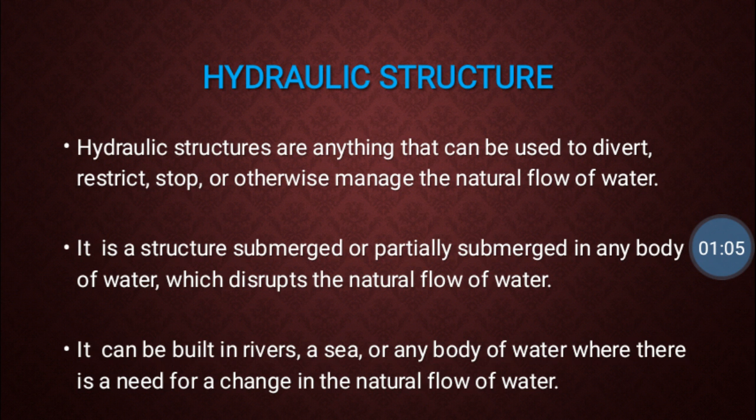hydraulic structure. The hydraulic structures are anything that can be used to divert, restrict, stop, or otherwise manage the natural flow of water. It is a structure submerged or partially submerged in any body of water which disrupts the natural flow of water. It can be built in rivers, a sea, or any body of water where there is a need for a change in the natural flow of water.

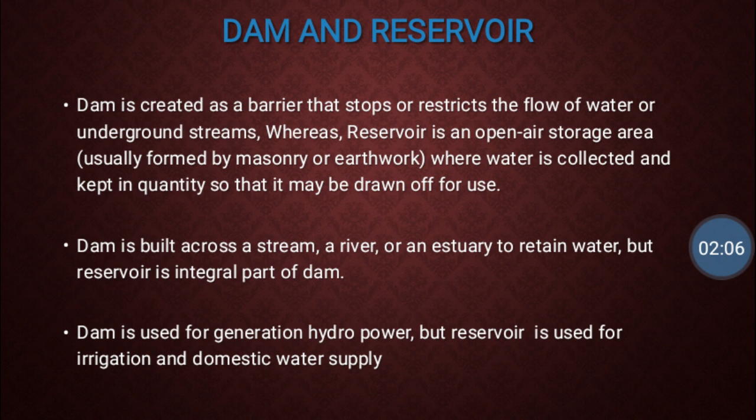Now, dam and reservoir. There is quite a difference. The dam is created as a barrier that stops or restricts the flow of water or underground streams, whereas a reservoir is an open air storage area where water is collected and kept in quantity so that it may be drawn off for use. A dam is built across a stream, a river, or an estuary to retain water, but the reservoir is the integral part of the dam. The dam is used for generation of hydropower, but the reservoir is used for irrigation and domestic water supply.

After several delays, the main dam was completed 20 years later on 26 July 1980. By second stage completion in 1987, the project converted to a multi-purpose facility with generation of 770 megawatt. At the top of the dam, a power station is located to generate and distribute the power.

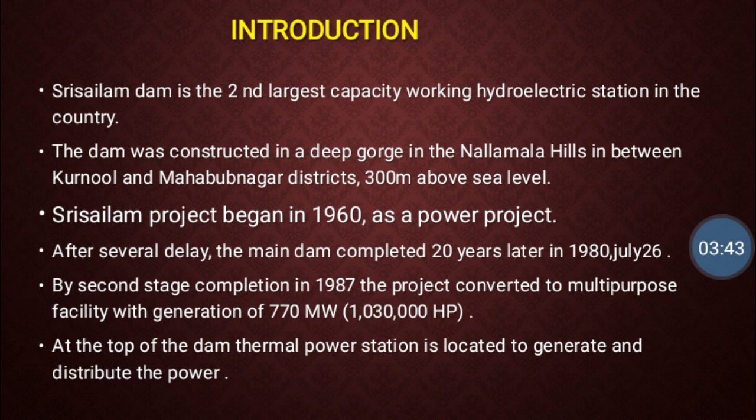Now, the general information. Its purpose: hydroelectric, irrigation and water supply. Country: India. Its location: Srisailam, Kurnool district in Andhra Pradesh. Coordinates 16 degrees 5 minutes 13 seconds north and 78 degrees 53 minutes 50 seconds east. Construction began 1960. Opening date 1981. Construction cost 10 billion rupees. Owner: Government of Andhra Pradesh.

Now, regarding dam and spillway, the type of dam is gravity dam with top elevation 275.54 meter, height above the deepest foundation level is 476 feet. It impounds the Krishna River, height 145.10 meter, length 512 meter, spillway: ogee spillway. Maximum discharge capacity of this spillway is 38,369 cumecs. Number of spillway gates is 12 of size 18.3 by 16.7 meter. Number of river sluices is 2 of size 3.65 meter by 9.14 meter.

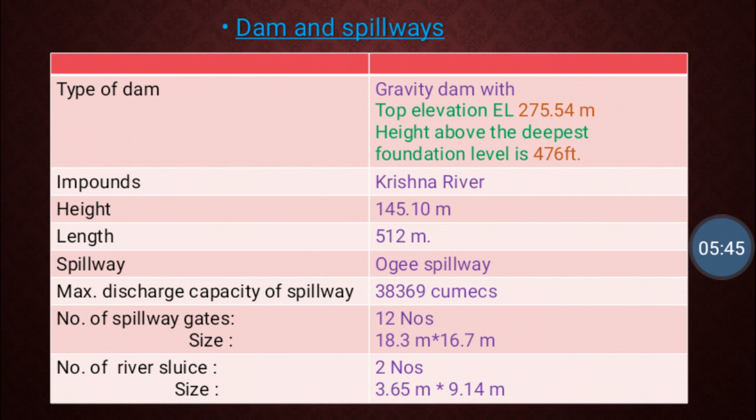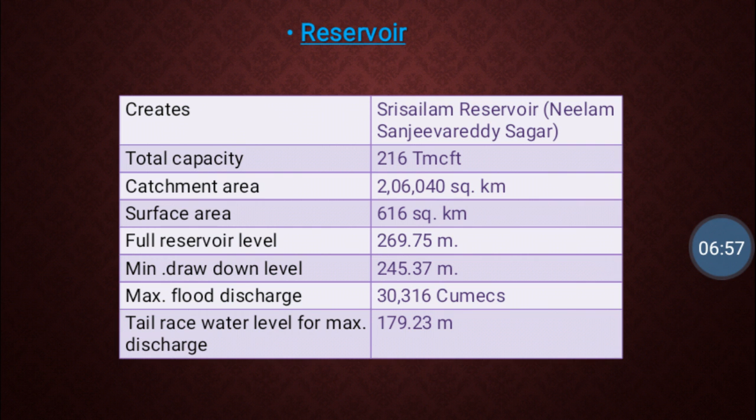Now reservoir. It creates Srisailam Reservoir, that is Neelam Sanjeeva Reddy Sagar. The total capacity of this reservoir is 216 TMC feet. TMC feet is 1000 million cubic feet. The catchment area is 2 lakh 6040 kilometer square. Surface area 616 kilometer square. Full reservoir level 269.75 meter. Minimum drawdown level is 245.37 meter. Maximum flood discharge is 30,316 cumecs. Tail water level for maximum discharge is 179.23 meter.

Now power stations. The operator is APGENCO, Andhra Pradesh Power Generation Corporation Limited. The turbines: 6 of 150 megawatt reversible Francis type turbines are used on the left bank, and 7 of 110 megawatt Francis type turbines are used at the right bank. Installed capacity is 1670 megawatt. The picture of the Francis type turbine is given below.

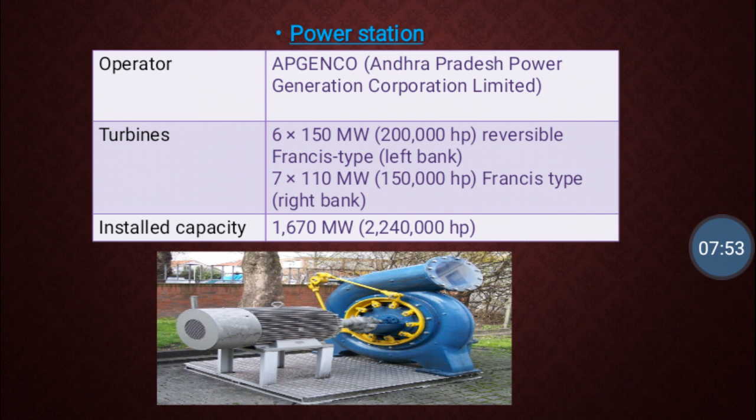Now I will tell you about the irrigation scheme. The Srisailam right main canal is constructed with 44,000 cusecs capacity at Srisailam reservoir level of 269.22 meter mean sea level to feed the 5 reservoirs, that is Veligodu reservoir 16.95 TMC feet, Brahmamsagar reservoir 17.74 TMC feet, Alaganoor reservoir 2.97 TMC feet, Gorakallu reservoir 12.44 TMC feet, Somasila reservoir 78 TMC feet.

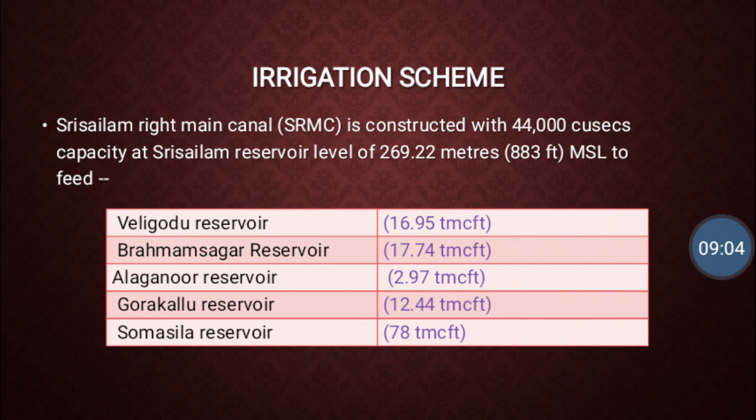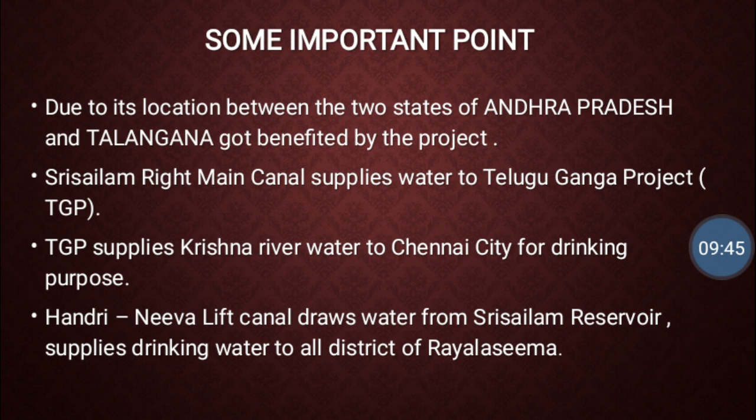There are some important points regarding the Srisailam reservoir. Due to its location, the two states of Andhra Pradesh and Telangana got benefited by this project. Srisailam right main canal supplies water to the Telugu Ganga project. TGP supplies Krishna River water to Chennai city for drinking purposes. Handri-Neeva Lift Canal draws water from Srisailam Reservoir and supplies drinking water to all the districts of Rayalaseema.

Now some important facts for hydroelectric power. At present, the initial inflows into Srisailam Reservoir are stored excessively without using for power generation. The tail pond was completed during year 2017 and pumping mode operation is being done. Even the downstream Nagarjuna Sagar Reservoir water level is below 162 meter mean sea level. The tail pond has nearly 1 TMC live storage capacity.

Water supplies were maintained by APGENCO using two power stations, left bank and right bank, and transmitted through AP Transco. The tail pond dam is located 14 km downstream of Srisailam Dam, under advanced stage of construction, to hold the water released by the hydro turbines and later pump it back into Srisailam reservoir by operating the turbines in pump mode.

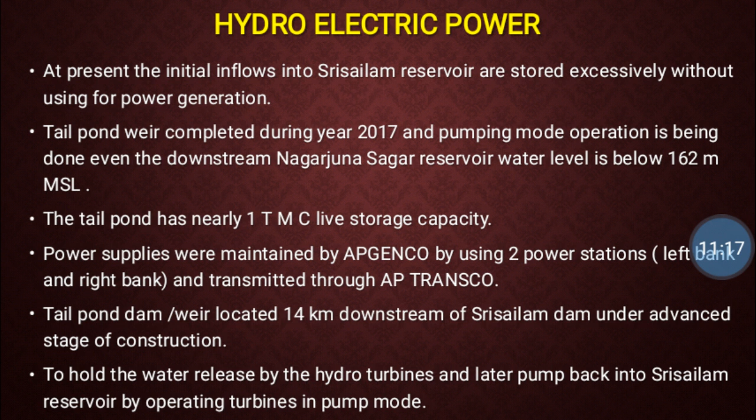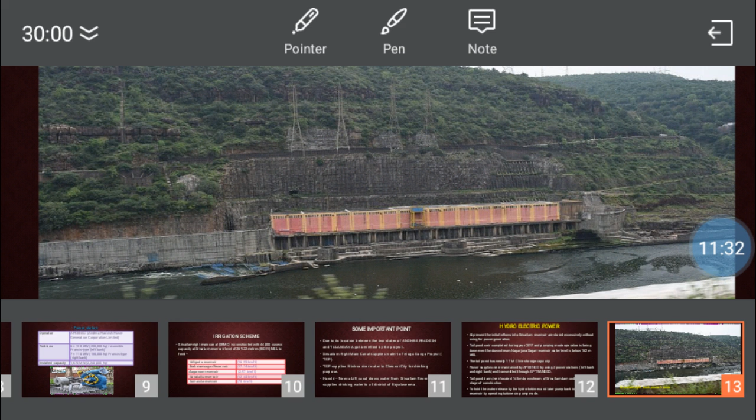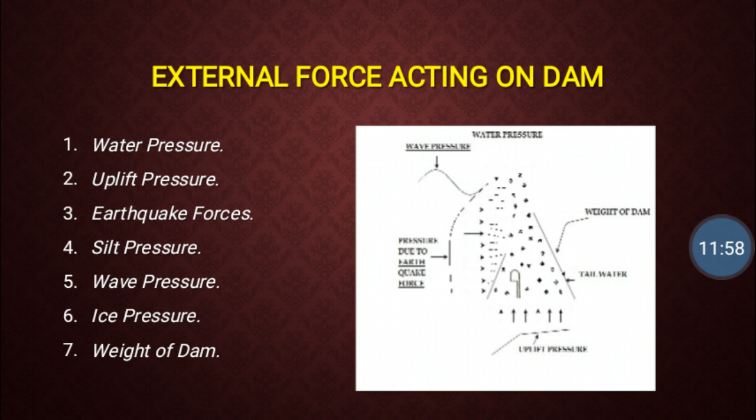This is a beautiful picture of Srisailam right bank powerhouse. Now there are some external forces acting on this dam, that is water pressure, uplift pressure, earthquake forces, silt pressure, wave pressure, ice pressure, and weight of dam. The picture includes all these forces as shown here.

First one is water pressure. Water pressure is one of the major external forces acting on a gravity dam. The horizontal water pressure exerted by the water stored on the upstream side of the dam can be calculated from hydrostatic pressure distribution. The picture has the resultant of this pressure from the base at the height of h by 3.

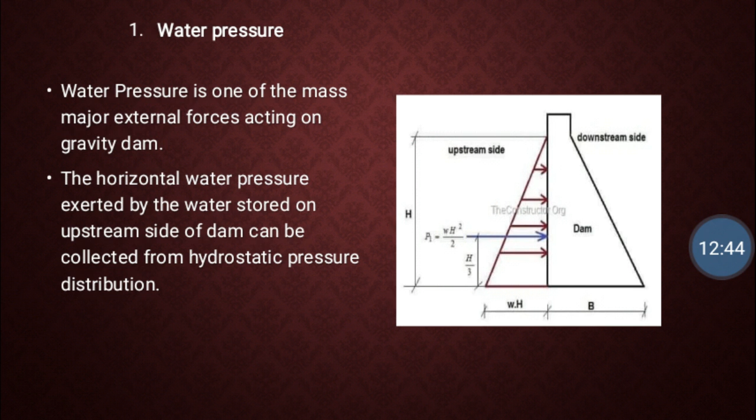The second one is uplift pressure. Water seeping through the pores and fissures of the foundation material and water seeping through the body of the dam. This pressure virtually reduces the downward weight of the body of the dam, hence acts against the dam stability. It can be controlled by constructing cutoff walls under the upstream face, by constructing drainage channels between the dam and its foundation, and by pressure grouting the foundation.

Here I provide a picture which includes two figures. One is without drainage gallery and one is with drainage gallery. Both have different pressure distribution diagrams.

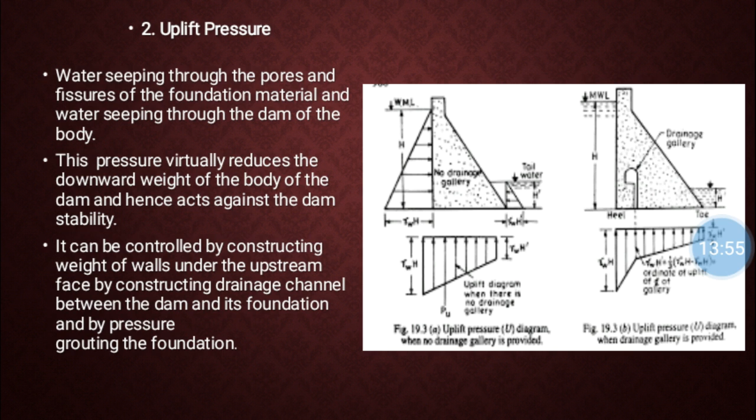Third one is earthquake forces. The effect of earthquake is equivalent to imparting an acceleration to the foundations of the dam in the direction in which the wave is traveling at the moment. Acceleration can be split into two components. First is horizontal component, second is vertical component. So the horizontal acceleration alpha h is equal to kh into g and vertical acceleration alpha v is equal to kv into g.

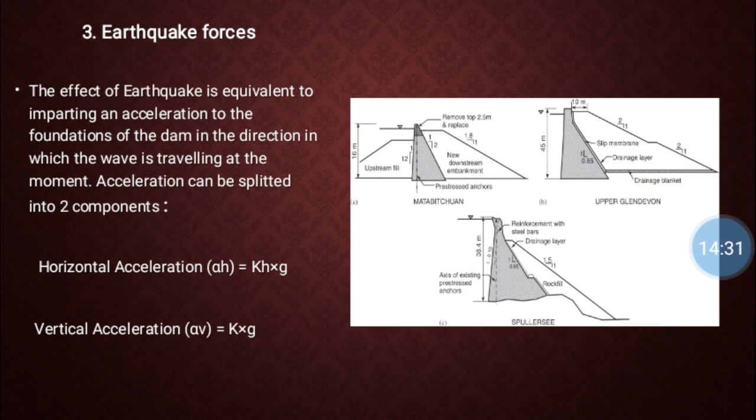Now silt pressure. If h is the height of silt deposited, then force exerted by the silt in addition to external water pressure can be represented by Rankine's formula. The formula is P is equal to half into gamma submerged into h square into Ka, and it acts at h by 3 from the base as shown in figure, where Ka is 1 minus sine phi divided by 1 plus sine phi. Gamma submerged is the submerged unit weight of silt material, and h is the height of silt deposited.

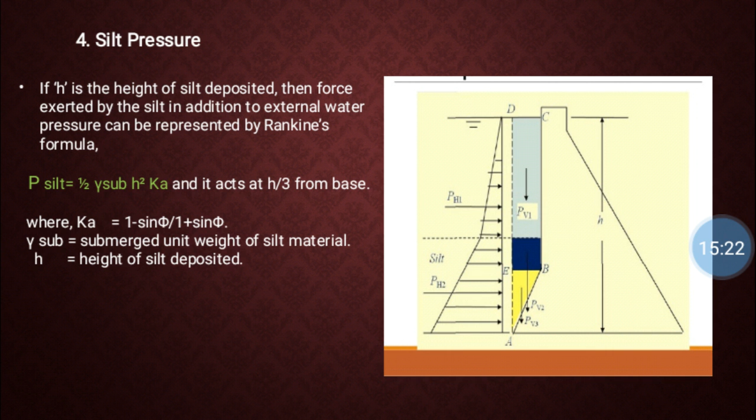Fifth one is wave pressure. Waves are generated on the surface of the reservoir by the blowing winds, which can cause pressure toward the downstream side, and it depends upon the wave height. The wave height may be given by the following equation, that is hw is equal to 0.032 into under root VF plus 0.763 minus 0.271 F power 1 by 4. This equation is valid for F less than 32, where F is the fetch or straight length of water expanse in kilometers. V is the wind velocity in kilometers per hour. hw is the height of water from top of crest to bottom of trough in meters.

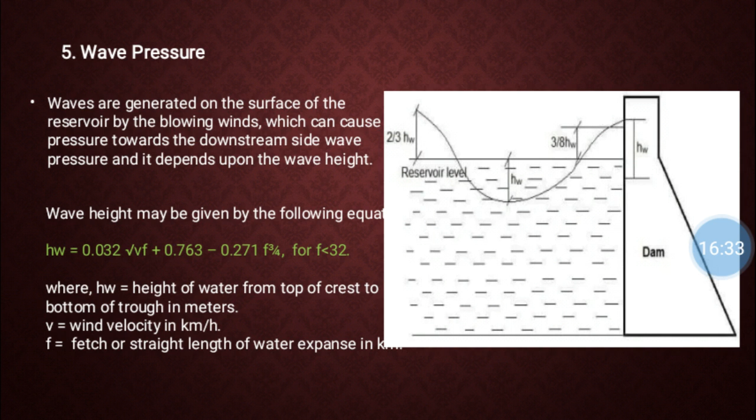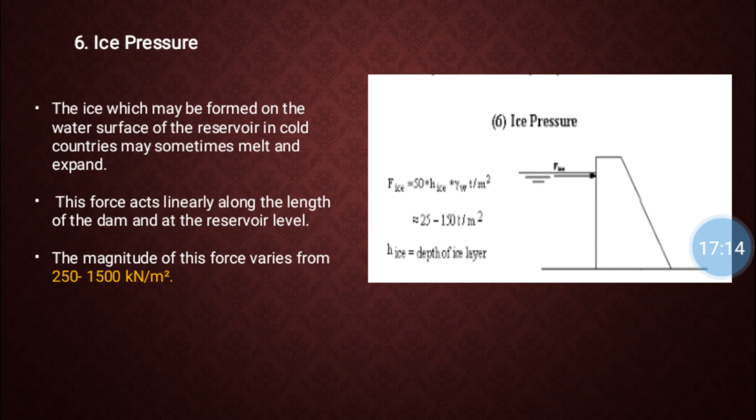Sixth one is ice pressure. The ice which may be formed on the water surface of the reservoir in cold countries may sometimes melt and expand. This force acts generally linearly along the length of the dam and at the reservoir level. The magnitude of this force varies from 250 to 1500 kilonewton per meter square. The diagram of ice pressure is shown here, and the last one is weight of the dam.